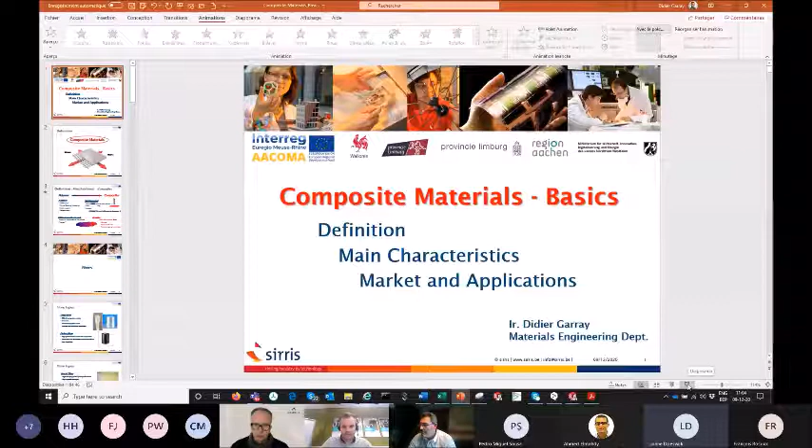Thank you, Manuel. First of all, do you hear me, everyone? Yes, I can hear you. Okay, perfect, thank you. Now I will share my screen, so I hope it will be okay for you. Do you see the presentation? I do not see you anymore, so if you could give me feedback. I don't see your presentation at the moment. You don't see my presentation? Oh. And now? Yes, it's working. Okay, so this is... and now? Excellent, okay, perfect.

Good morning, everyone. Like Manuel explained, thank you for the introduction, Manuel. I will present the wonderful world of composite materials, but the basics. For sure we will not go into depth into all the different capabilities of those materials, but I hope you will be, after this presentation, convinced that these materials—because there are a lot of them—are very interesting and could be very useful for your applications, whatever they could be.

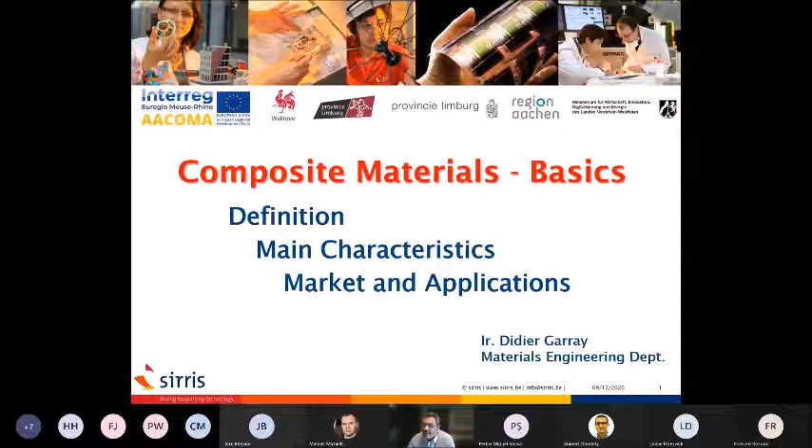This presentation will be divided into different sections. The first will be a kind of definition of what a composite material is, with an introduction of the different components, the materials used independently, and the role of the different components. The characteristics are also part of this presentation, and as Manuel said, I will have a part dedicated to the market and applications, so you will see it's very broad in terms of capabilities of this material. So let's start with the definition.

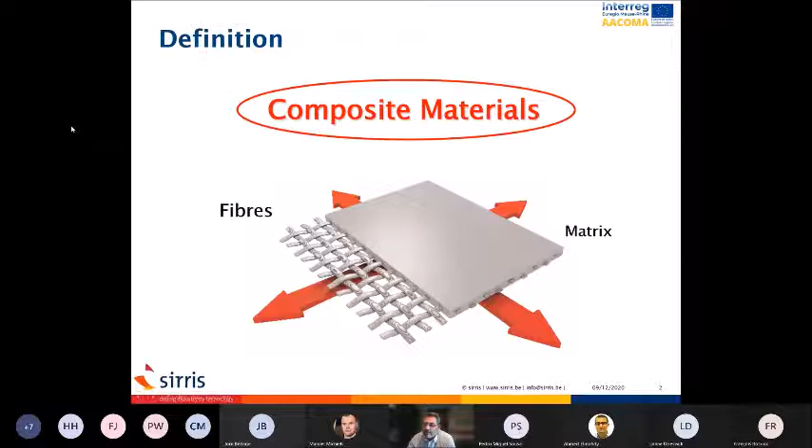What is a composite material? In fact, a composite material is a combination of two main components: the fibers for reinforcement and the matrix. But I have to introduce directly one specification: the distinction between what we call a filled or reinforced polymer versus a composite. When you add additives into a polymer, you can have extended performance like UV protection, thermal or electrical conductivity improvement, or flame retardancy. You can add different things into a polymer. In that case, we are speaking about a filled material, not a composite or reinforced one.

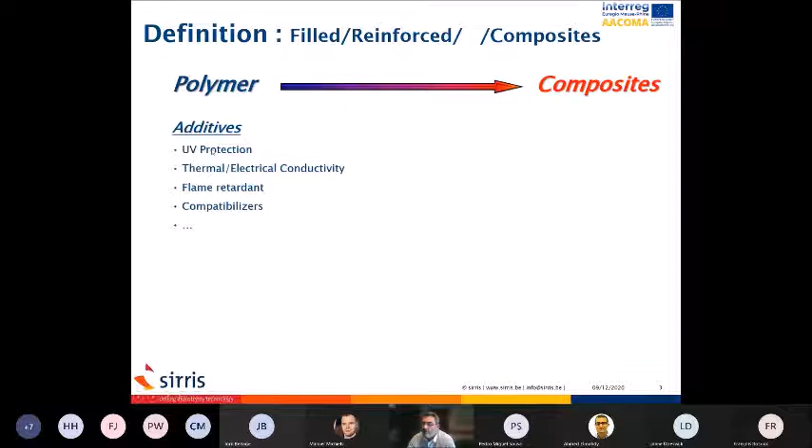If we are speaking about a reinforced material or composite, we are mainly thinking about the introduction of fiber. But not only, you could also have some beads, talcum, that gives mechanical improvements to the material. When we are talking about fibers, we can also distinguish between short, long, or continuous fiber. And only, in my point of view, when we are thinking about continuous fiber, can we really talk about composite.

For the rest, for sure, you will have improvement in performance, but this is not really what a composite could propose. What is important to know is that reinforcement will mainly give strength and stiffness improvement, but will also bring a lot of anisotropy into your product.

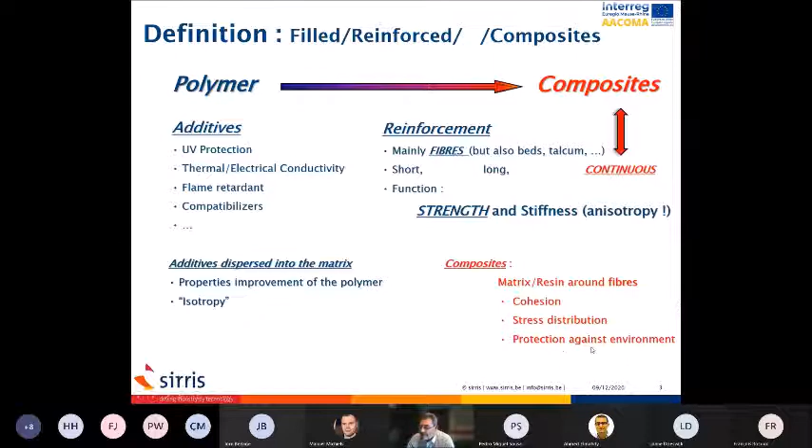So when we are speaking about additive dispersed into a matrix, we will talk about matrix improvement, and we can get a kind of isotropy. When we are speaking about composite, we are speaking about organization of fibers where a matrix brings cohesion, stress distribution, and protection against the environment for these fibers.

And for sure, there are so many capabilities that the boundary between both definitions is very fuzzy and not obvious in all cases. But what you have to keep in mind is that when you add additive, you change the properties of the polymer. When you are thinking about composite, the fiber is the main product and the matrix brings the coherence between them.

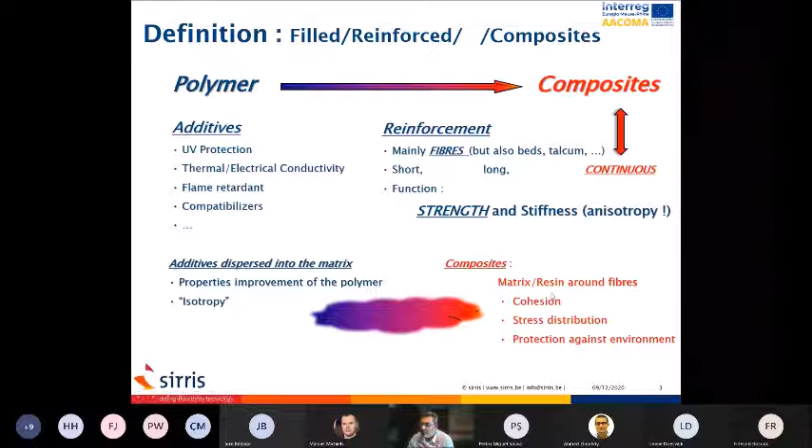We talk about matrix and fibers, so we are not going into detail about what the fiber is, or the different kinds of fibers. You probably know the glass fiber. This represents a lot of the composite market—nearly 90-95% of the composite market is driven by the glass fiber industry. Why? Because it's a low-cost fiber with high mechanical performance, with some insulation in terms of thermal or electrical performance. That's why glass fiber is the main used reinforcement for what we call composite.

But you also know about carbon fibers. There, for sure, we are talking about high-performance structural composite. The difference from the previous one is that here we are thermally and electrically conductive through the fibers. We also have to mention that carbon fiber has very poor performance in terms of flexibility. So you cannot make a knot, for example, with this kind of fiber, or manage very sharp angles easily, compared to other fibers.

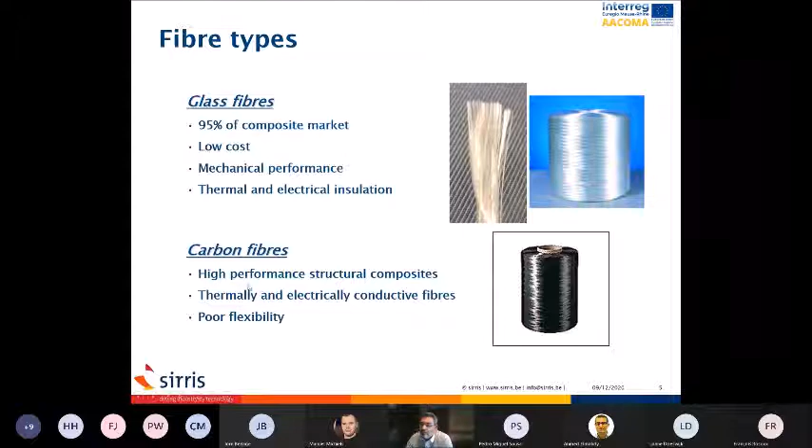Another kind of fiber is the aramid fiber, better known by its commercial names, Kevlar or Twaron. These, or more generically the aramid fibers, are dedicated to high damping and impact performance. These fibers also have very high specific strain. They are also used for very high cutting protection for operator applications, like the next one, which is called ultra-high molecular weight polyethylene.

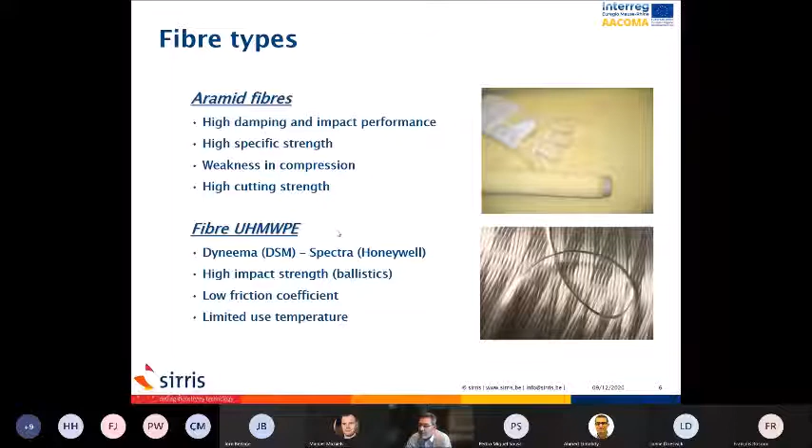Here too, the trade name or commercial name is better known: this is Dyneema or Spectra. Once again, this fiber is dedicated to very high impact performance, even up to ballistic protection. It's also used for applications where a low friction coefficient is needed. One drawback of this fiber we have to mention is the limited use temperature, around 120 degrees. For higher temperatures, you will have a very large decrease in performance.

Less known or more confidential fibers, if we can call them that, are basalt fibers. These fibers, emerging now for 10-15 years, are dedicated to high temperature composites. We can reach much higher temperatures with them, for example 500 or 600 degrees, though the matrix also needs to withstand those temperatures. If possible, these fibers are quite low cost compared to carbon fiber, with similar or even slightly higher specific properties than glass fiber.

And yes, metallic fiber can also be used for composite production, fabrication, or design, for very specific applications and expected properties like electromagnetic shielding, electrostatic discharge, and even to give more density to the final product. The advantage is that you can use composite production facilities to make very complex shapes, and the high density of the steel or metallic fiber brings inertia.

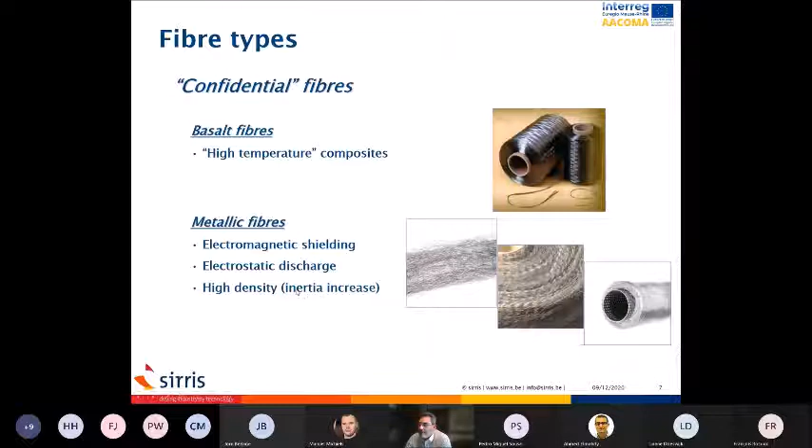And last but not least, the natural fibers. Natural fibers like flax, hemp, jute, cotton are bio-based fibers. So this is really the best option when we are talking about circular economy. And even if it's not obvious, some natural fibers can bring very interesting mechanical performances. For example, flax fiber presents similar performance to glass fiber. We will see that later in a table summarizing the properties.

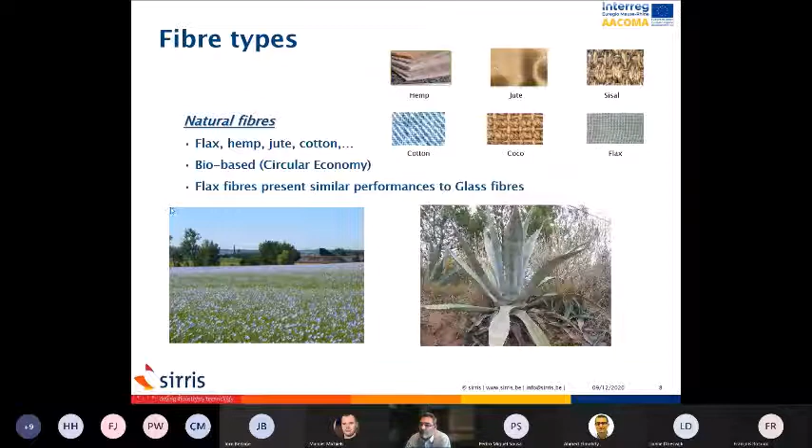We also have to take into consideration some pros and cons of natural fibers. The pros: low cost, neutral for the carbon footprint, and for sure it's a renewable material. If you're talking about industrial processing interest, this is a fiber which is not abrasive for the tooling. Compared to glass fiber, this is a large advantage. We can also talk about good specific properties, strength and stiffness, but also in terms of damping, thermal or acoustic insulation.

Now the cons. Yeah, for sure, this is a natural fiber, a natural product. There is a risk of water absorption which also leads to reduction or modification of the mechanical properties. Low thermal resistance, so this is quite limited in some cases, as you will see later. If we are at the range of 230 degrees, you have a very drastic risk of reduction of the mechanical performances. Last but not least, there is a quality dependence on the geographic growth area and the year-by-year meteo. Because this is a natural product, you must consider it as a living product, like wine for example. Wine is a perfect comparison to those fibers, because depending on the region or the year, you could have good or bad product. This is very similar.

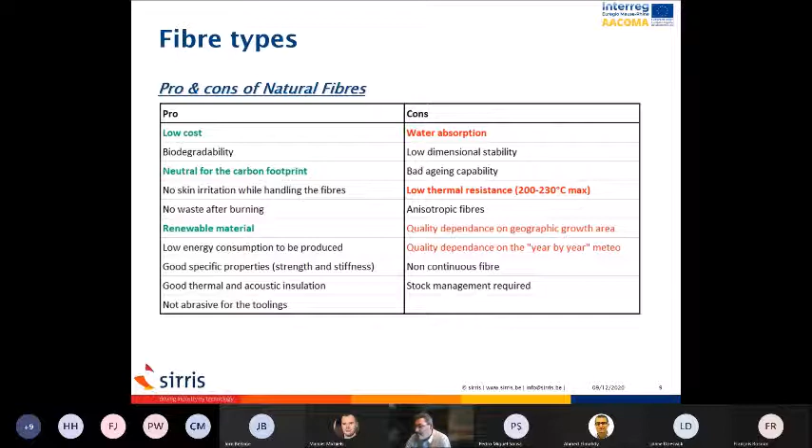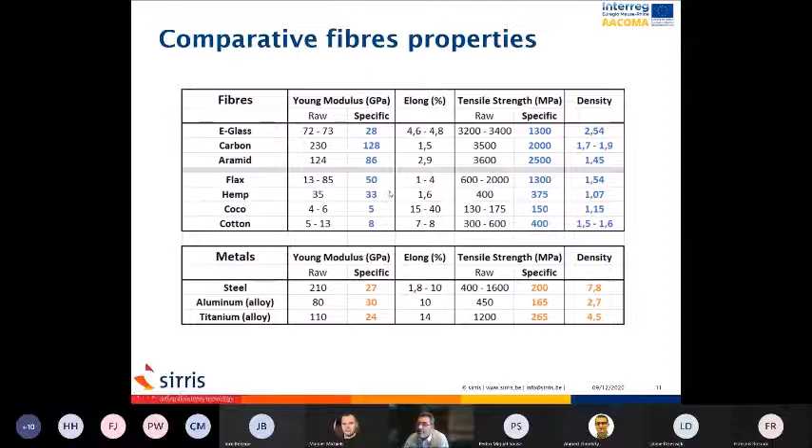If we now make the same comparison but in terms of specific strength, we see that the order of magnitude or improvement is not a factor of 2, 3, 4, 5, but a factor of 10. We are here at a range of 200 more or less for the metal, and we can reach easily with the fibers, even for flax fiber, a value above 1000, even 2000 or more. So we can say here we are at one order of magnitude. This is coherent with what I said: when we talk about composite, this is more with the aim of putting in advance the strength, and in second advantage the stiffness. You have to take that into account.

So I said at the beginning that composite material is a mix between fiber and matrices. And the matrices, we also have different kinds of them.

The first distinction is about the nature of the matrix. We are here at the end of the slide, MMC, CMC, and CC. These are what we could say not organic matrices: metal matrix composite, ceramic matrix composite, carbon-carbon. These are products dedicated to very, very high and confidential applications. The more common products are the organic resins, like thermoset or thermoplastic.

I will now try to explain the difference between thermoset resin and thermoplastic resin, because this is very important. The most known thermoset resins are polyester and epoxy, but there are a lot of other possibilities: phenolic, vinyl ester, cyanate. All of them are processed like liquid resin, very low viscosity material, meaning you can use this flow capability to wet a dry architecture of reinforcement.

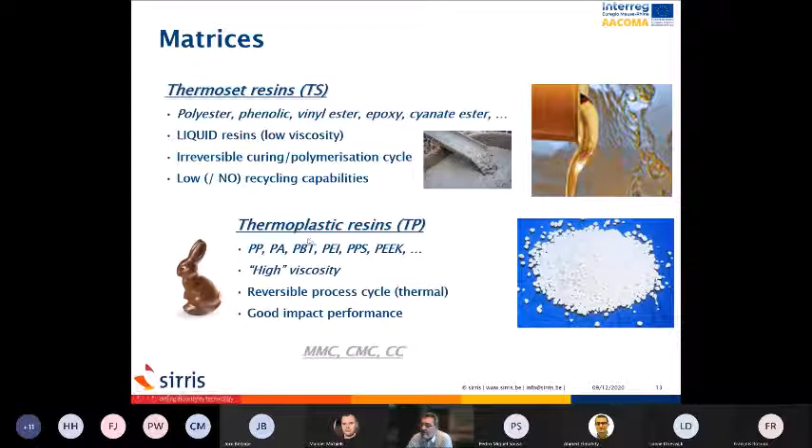Interesting information: thermoplastic resins are also very good for impact performance, especially compared to thermoset. I hope you understand well the difference between the two kinds of organic matrices, because this is important for the good understanding of the rest of this presentation on basics for composites.

Now I'm moving on to the drawbacks of thermoset composite, because 20 to 30 years ago it was a great challenge in terms of ecology in the world of composite materials and activities. There are great problems and issues due to solvent release, mainly styrene. Also, from the economical point of view, this is a long time processing - chemical modification, called curing, could take some hours to be fully finalized. And like I already said, there is a very high problem concerning the recycling of this material.

So, like I said, it was the problem 20 to 30 years ago. Some solutions were proposed, and the providers or suppliers of thermoset resin worked on this problem, proposing resin with low solvent content or solvent release capabilities. Also, the processing technology was improved by closing mold instead of open system, so better control of what was released and better handling of those solvents. And what was also very important: development of alternative composites. So you have in the previous slide the presentation of the difference between thermoset and thermoplastic, but that was just the matrix.

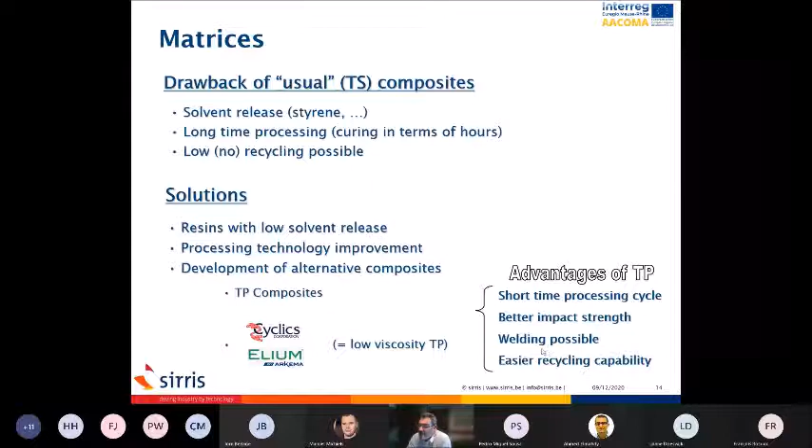When we talk about this example of cyclic product, we can see that when we want to process it by chemical reaction, we reduce it to monomer or oligomer, very, very short length molecular systems that are very fluid. The viscosity of this CBT chain could reach more or less 1/5000th of the value of the PBT, which is the linear recombination of those molecules.

So this way, it's possible to flow the product, the matrix, into the dry reinforcement network. And we can adapt the reaction time by playing on the chemical data of those materials, and also with the temperature.

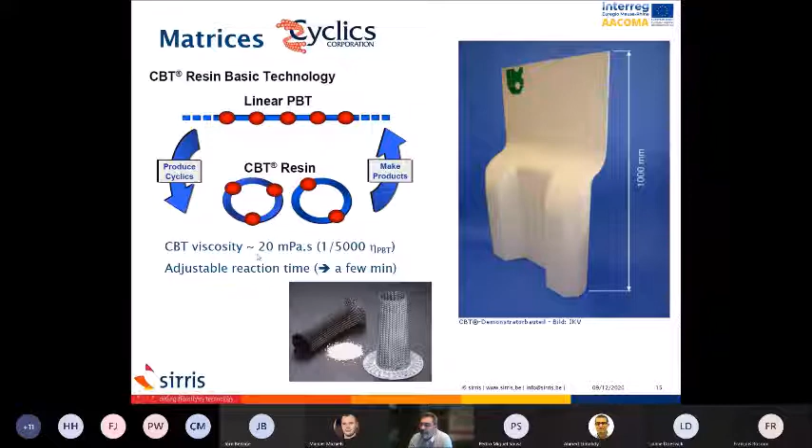Newer is the Elium product. This is a matrix produced by Arkema. Once again, the advantage of this specific product is dedicated to what I already mentioned: the circular economy, the capability of using production technology of conventional thermoset techniques, even for large parts like wind turbines.

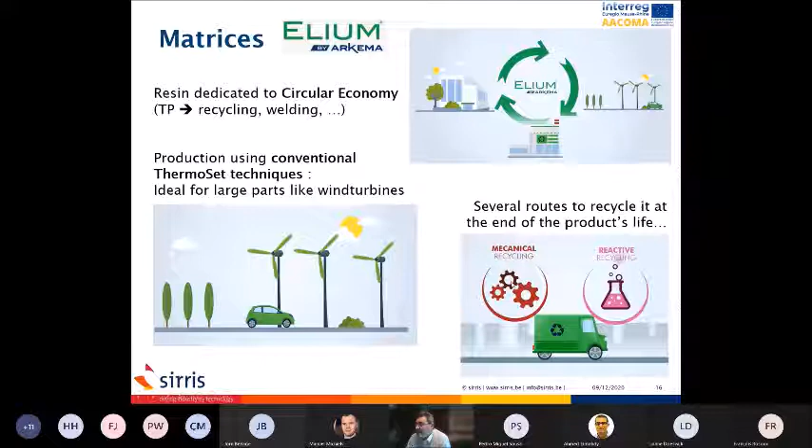And the capability of recycling is, of course, a very high advantage of this. They also propose different ways of mechanical or reactive recycling.

I mentioned the fact that thermoplastic composites have also been developed with the objective to avoid the need of flowing the resin into the reinforced network. How can we do that? We can do that by placing the matrix already at the right place in the raw material.

If you can process a matrix, a thermoplastic matrix, in terms of bulk material, you can also, sometimes - not all, but a major part of them - process it in fibers. So we can use fibers to bring the matrix to the right place in the raw material. So no movement apart from fiber to fiber, but in the cross section, you do not have to have a very high flow capability. So this is the first way, commingled fiber.

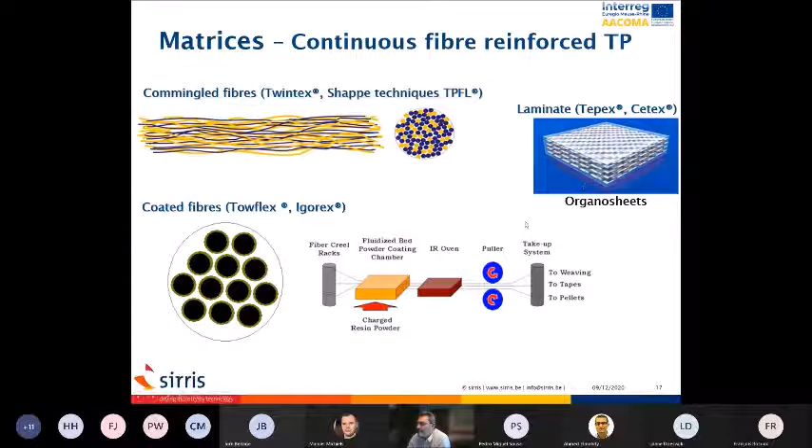In fact, because it's available, you are able to choose this kind of material for the final composite, the thermoplastic composite product, depending on the operating temperature, for example, mechanical performance. I put that in brackets because, as you know, it's not the matrix that will give the mechanical performance of the composite.

This will be the fiber. Of course, it could be interesting to have a stiffer or high performance matrix, but in fact, it is the fiber that gives the real performance of the composite.

But regarding chemical resistance, the fiber will not see the fluid or material in contact with the product. It's the matrix that is in contact, not the fiber. So the choice of the matrix is very important for this parameter.

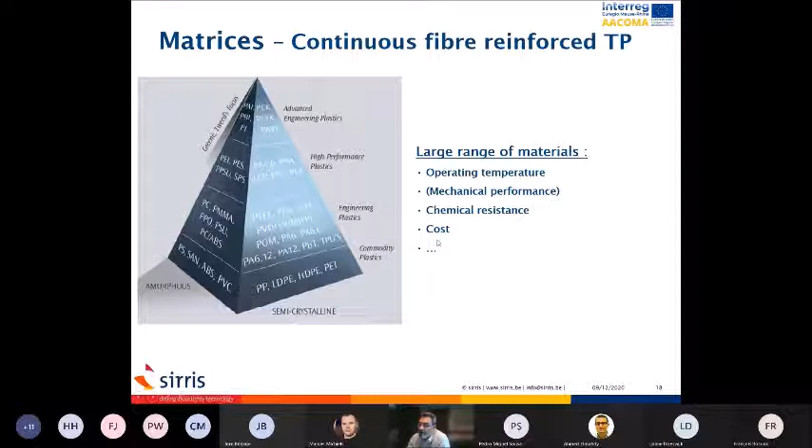And for sure, you also have to take into account the economical point of view, since the cost of the product is also partially, and even highly, driven by the matrix nature.

But even with all those combinations of fiber, you can also choose or select the matrix you want to work with: polyamide, PBT, PPS, up to PEEK. And you can already see through the figure that different other parameters could be asked to the supplier.

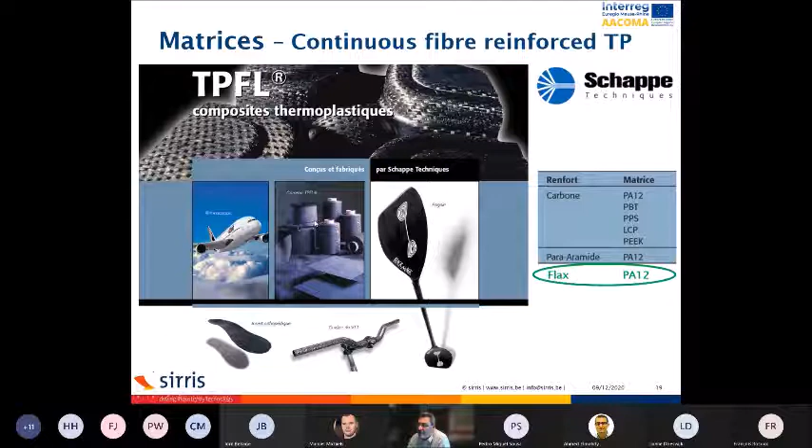These are the cut fibers, the UD web, or the fabric, the twill weave. Here the fibers are cut, so if I come back to my definition, we are more in a reinforced product than in a real composite. But, like I said, it's quite fuzzy to clearly distinguish both materials.

So here it's a way of having the reinforcement as cut fibers, randomly dispersed. Or you have the UD web.

All the fibers are oriented in the same way in the UD web, while in the weave, twill weave or other kinds of weave or fabric, you have a part of the fibers in one direction and a part in the perpendicular direction.

We can talk about an equilibrium weave if we have, for example, 50% of the fiber in one direction and 50% in the perpendicular direction. But if you know those architectures, there are a lot of other capabilities giving different and specific properties.

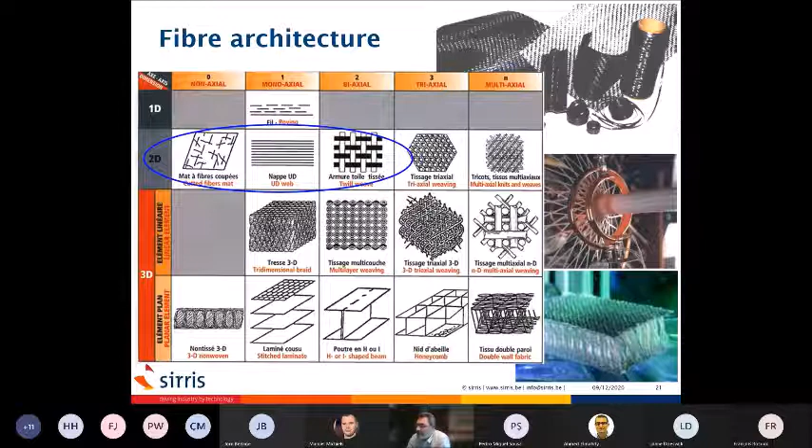This is already a design application.

Now, concerning composites, when we discussed earlier the performance of the fiber used for the composite compared to metal or to competitors, I mentioned that we were looking at the performance of the fibers, not performances of the composite. Now we are going one step further with the performance of the composite, taking into account the architecture parameter.

To understand it, take a carbon fiber with very high performance in one direction, the horizontal one, and compare it with an isotropic material, the metal. You see that the fiber offers better performance, even two or three times or more than the metal, but only in one direction, while the metal offers the same performance in all directions.

So if we want to suppress this drawback for the fiber in the perpendicular direction, we have seen that we can propose a product which is a fabric or weave structure, with fibers in direction 0 and fibers in direction 90 degrees.

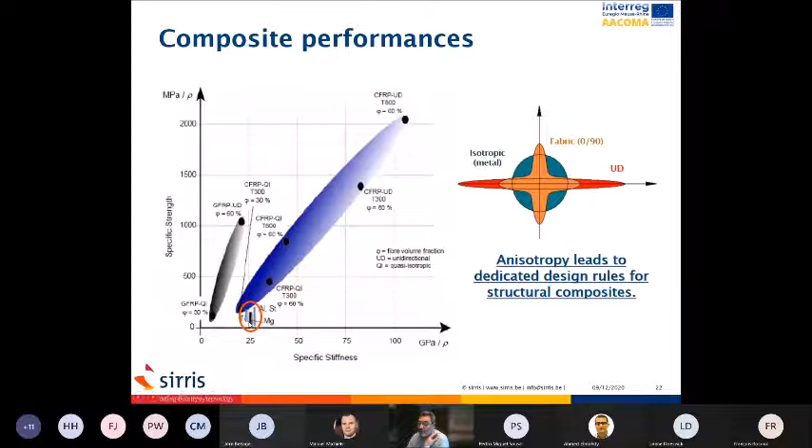But in fact, you have a UD material. So if you want to realize a shroud, for example, for a bridge, no problem, that's the perfect product. But now if you want to use it for a more common and more universal performance product, you have to take into account the different parameters.

If you come from T800 to a more conventional fiber, which is the T300, you'll see that you have a decrease of the performance. If you are now talking about quasi-isotropy in terms of UD direction, this point comes here with all the other parameters remaining the same. So that means you are now closer to the metal, but still with a kind of interesting improvement.

If you use T300 fiber, you come from this point to this one. And now, if you do not use a specific high-performance process which allows 60% of fiber into your product, but only 30%, you are here. And you see that you become less performant in terms of stiffness, and you are still with carbon fiber, but you remain very interesting in strength.

So now you understand why it's very, very interesting and very, very complex to design a composite product that is better than a metallic structure, even if you use the best product. The carbon fiber, the T700 or T300 or T800, are very well performant structures, but you have to take into account all the parameters to be sure that you design your product with the same performance or better performance than the metallic one.

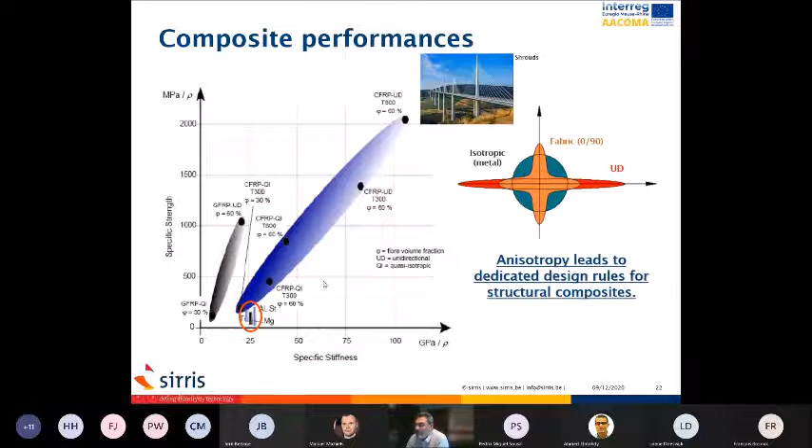For sure, composite can bring information about mechanical performance, but not only. In fact, what we know now is that composite brings specific strength and stiffness, mainly strength. But also you can play with other parameters, like the chemical resistance by choosing the right matrix, and good fatigue behavior also - this is something I did not mention earlier, but it is important.

And what is really important to know and understand is that composite material is not something you can find on the shelf and use like you do for aluminum or metal just by tooling it. This is a product - this is a material that is built during the building of the product. So both are built together. That means you have all the capability of parameters to design your material and product together to get the best set of results compared to the requirement.

You want electrical insulation or conduction, you take glass or carbon fiber. Same for thermal properties. You want damping performance, you can use aramid or Dyneema or Spectra fabrics. You can also play with natural fiber for the highest damping properties needed.

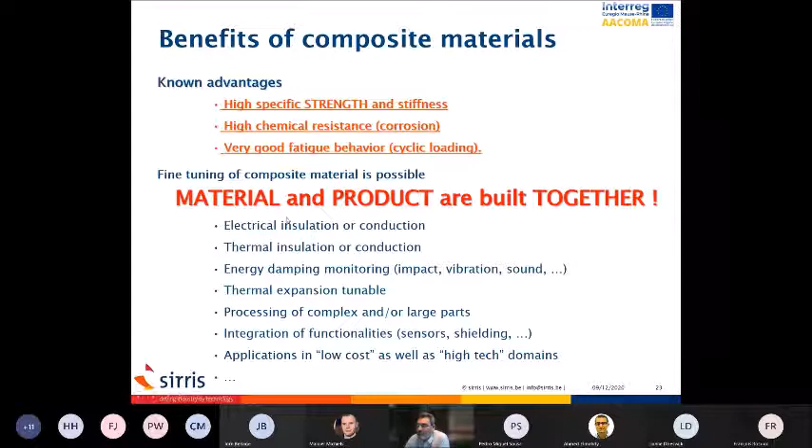I said that composite products or composite material are mainly defined by two components, the matrix and the fibers, but in fact, even the matrix could be additive, filled, and some of them could have interesting advantages.

For example, we can add nanotubes into the matrix to make it more electrically conductive or thermally resistant. If you put nanotubes into a polymer or organic matrix material, you can have anti-fouling or biofouling performance. That means the shell of the boat, for example, is prevented from the anchorage of shells from the sea, so you will not get a drag performance reduction of the boat from impurities or pollution on the shell, which can cause large cost increase by this reduction of drag performance.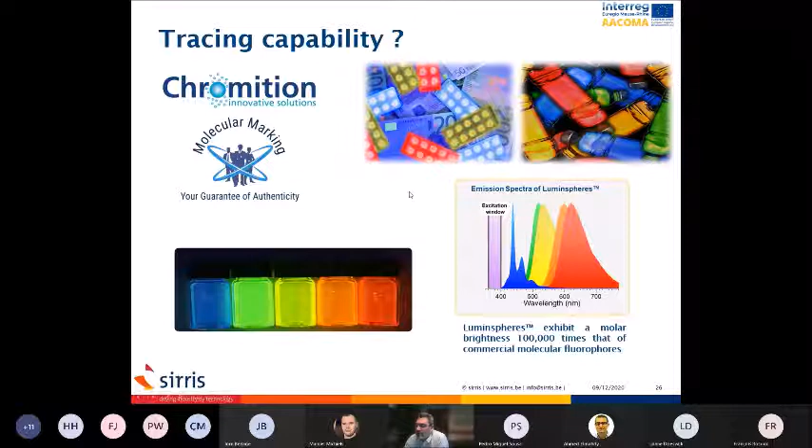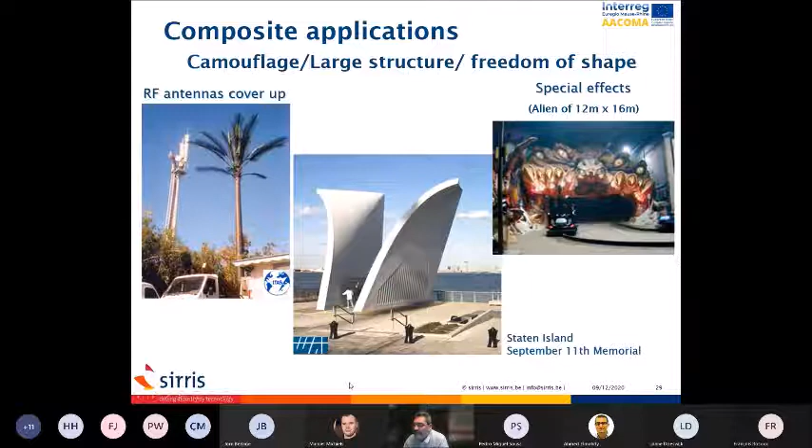So the idea is that the tree is in fact the composite part, and it's dedicated to the cover-up, the camouflage of an antenna, an RF antenna, just to show that there is a possibility of using composite in different kinds of applications. For sure, for leisure, you can also have a very nice illustration of the composite's capability, freedom of shape, and large parts of production.

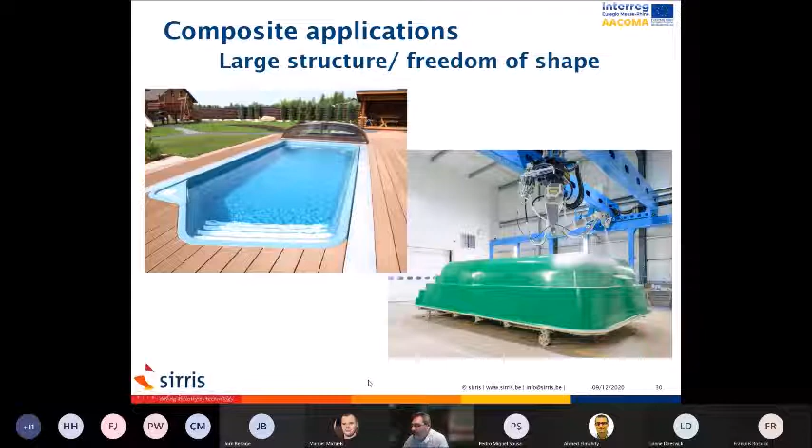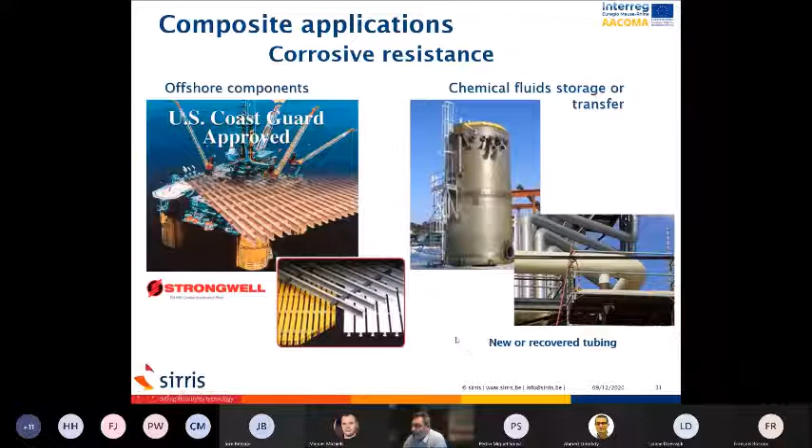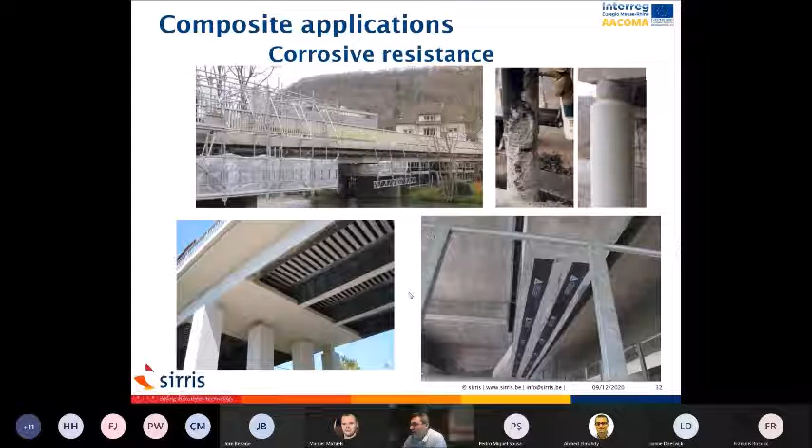Recovering solutions are used not only for corrosive and chemical applications, but also for some bridges. You know that some bridges are very impacted by salt or rain that can corrode the steel reinforcement present, so reinforcement recovering of those building structures can be done with composites.

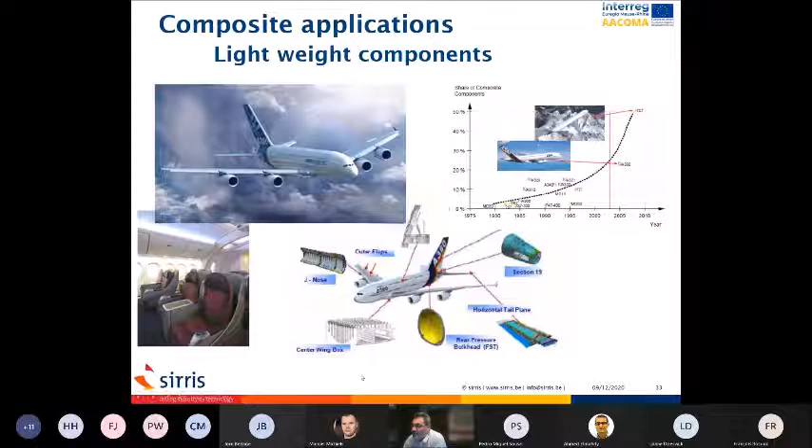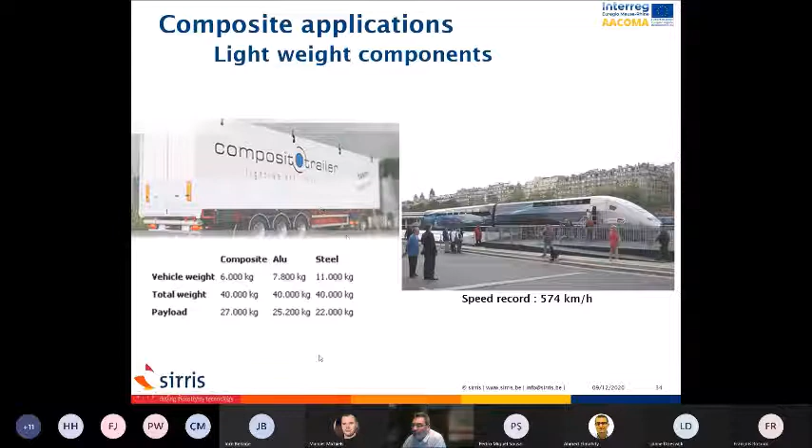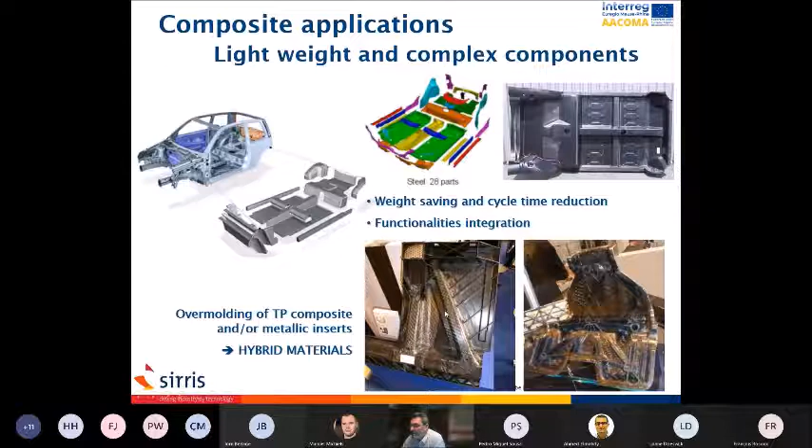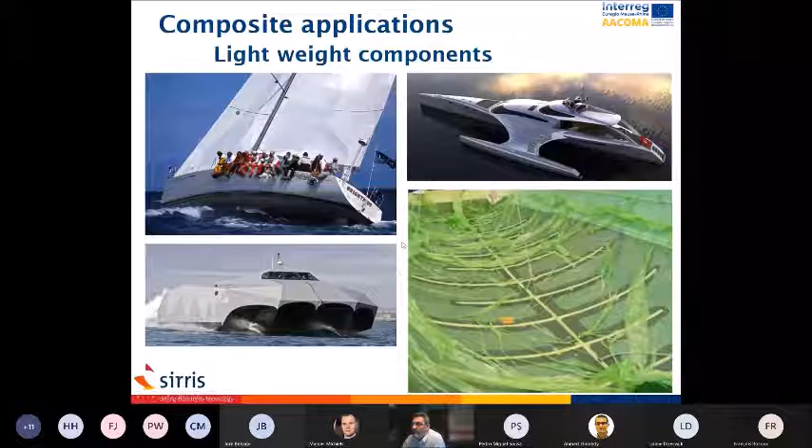For the boat industry, this is also really important to have the lightweight and the large capability in complexity in shape.

For the wind turbine, the interest of having very large wind turbines is the fact that the surface concerned by the wind turbine is directly linked to the dimension of the blade. So coming from a 12-meter blade to a 100-meter blade, you see that you have a lot of energy, proportional to the dimension of the product.

And you can see here one of the blades, which is more than 80 meters long, transported from the production site to the exploitation site here in Danish operations.

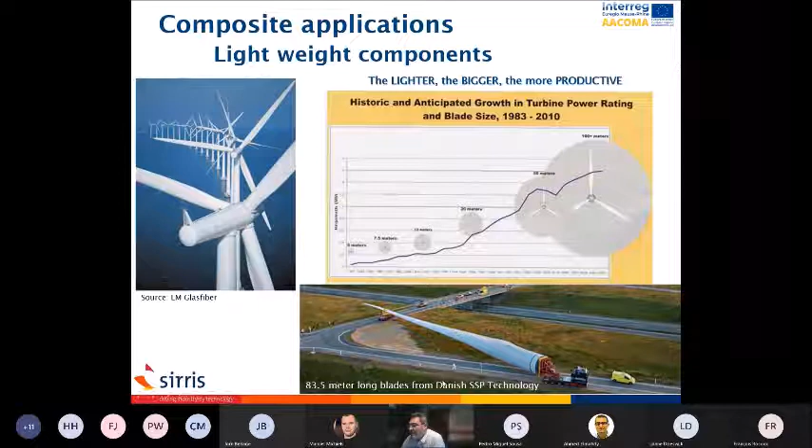If you want to use it for bridges, you can have different advantages, either during the building, handling and installation, where you can use very low weight capabilities for building the bridge structure, or during service, where you can also take advantage of the weight saving, for example, for mobile bridges, where the motor or engine that drives the bridge is also really proportional to the weight you have to move.

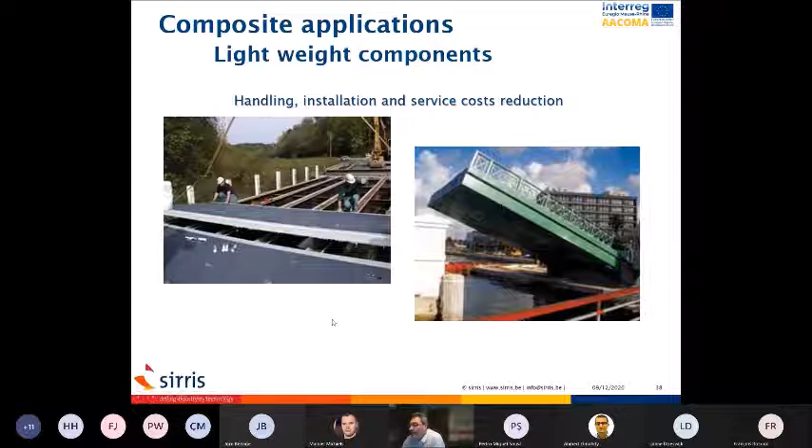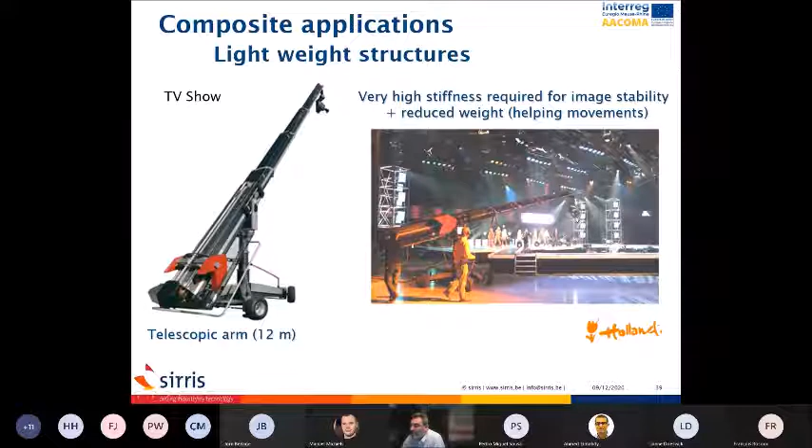Here it's an example of a structure dedicated to broadcast activity. The target specification was to limit the number of operators, so only one operator can manipulate an arm with a camera on the end, with a capability of a 12-meter long structure. And the stiffness is important here, because without this kind of stiffness, you will have vibration at the end of the arm, and so also some waving of the image.

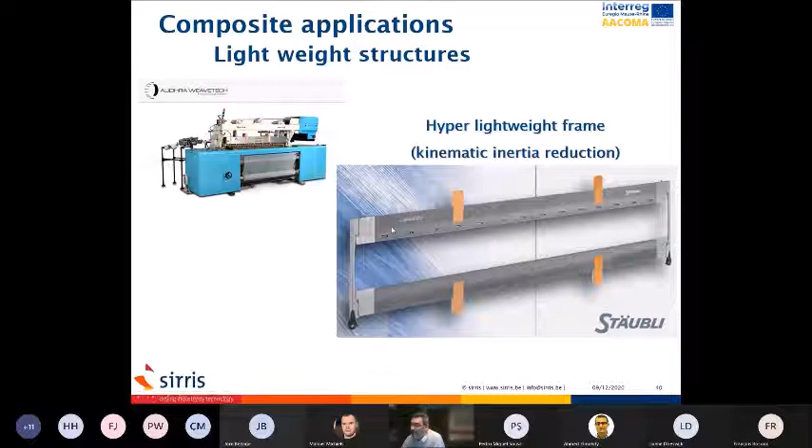When you are talking about speed or very high inertia, you can see that even in the industrial sector, like the weaving, textile industry, the use of composite is important. Here, for example, this kind of frame can reach a speed or alternate speed of 5,000 cycles per minute. So you can imagine that weight saving, combined with strength, can bring very large advantages to the structure.

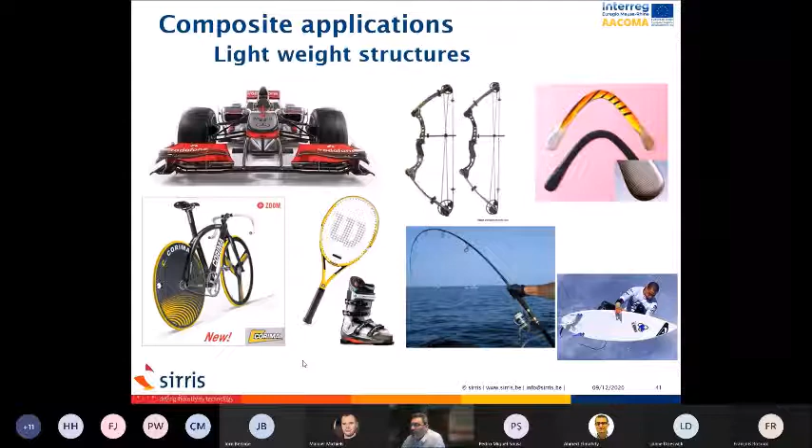Sport applications are also very well using composite material, from the car industry, Formula One, the bicycle. You can see here in the fishing rods the interest of having a material which is strong while keeping very light opportunity. So there are very large, broad applications dedicated to sport for composite material.

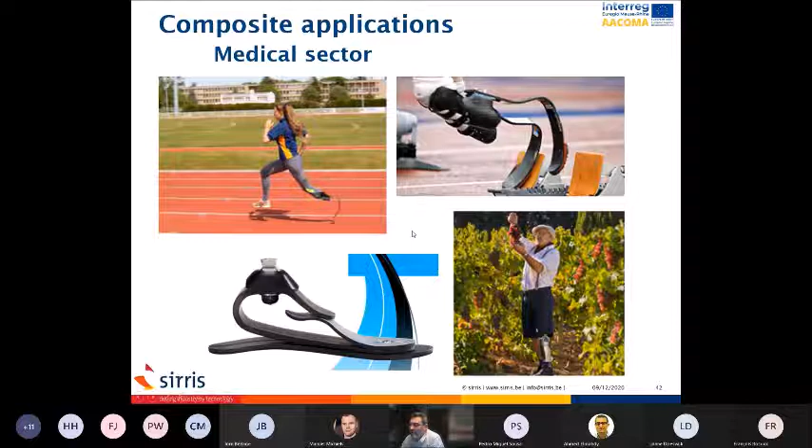The medical sector can also be very interested in composite material. Here, for example, the advantage is really dedicated to the customization capability and the lightweight of the product, the prosthesis or the orthesis. So there is also here a large capability, a large activity in terms of composite use.

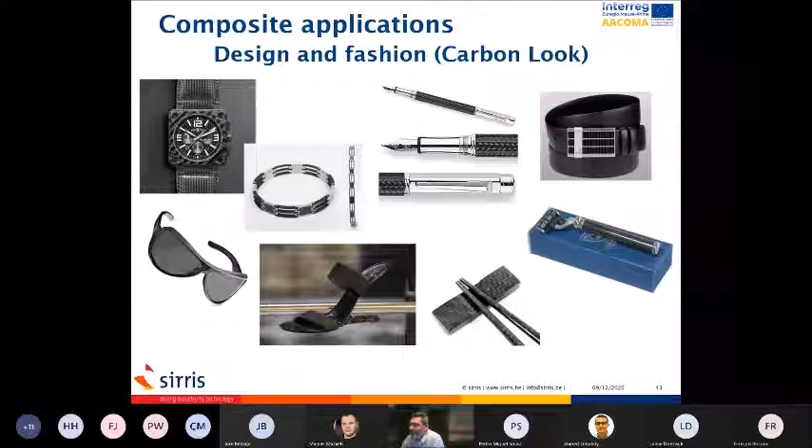The shoe. Yeah, I do not know who, but you will probably get a gift at the end. Manuel, you manage that? Okay, that's for sure.

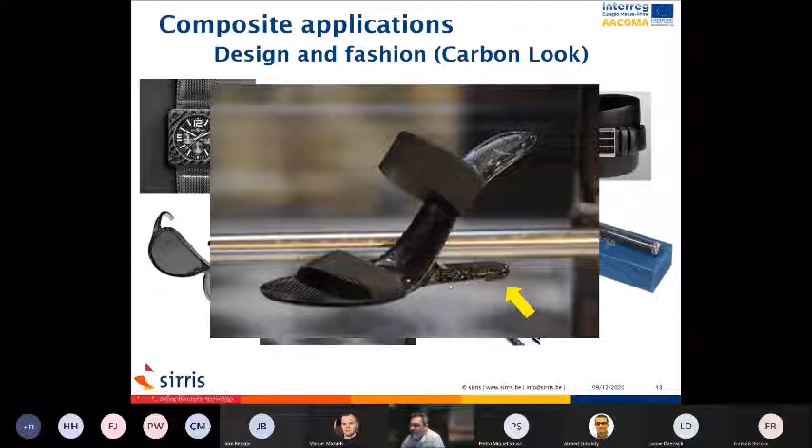This is the shoe, because you can see here the heel is really oriented towards design and fashion, and specific to the capability of the composite. And for sure, here the mechanical performance is of first importance.

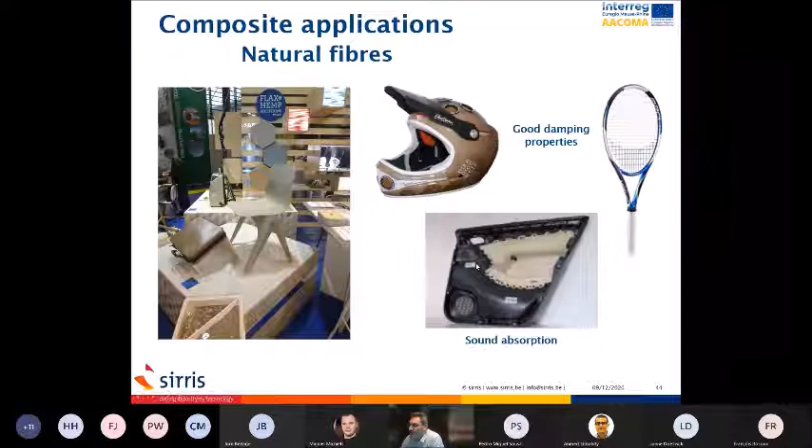So I hope that through this presentation I gave you some indication, and now you are better able to see what is possible with this material, this amazing and wonderful material, which is the composite. And when I say the material, I have to say those materials, because as you know now, there are a lot of capabilities, possibilities and variabilities in the production and the parameters used to process this material.